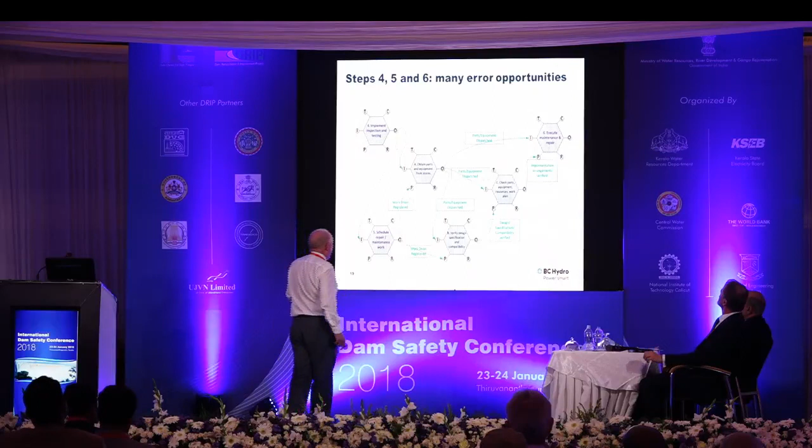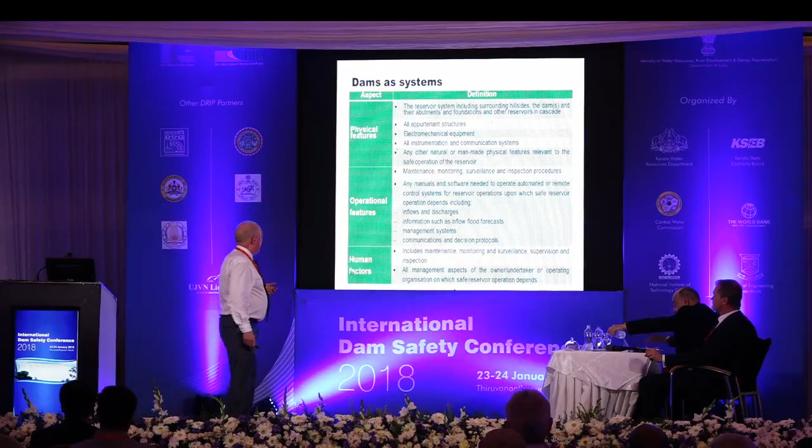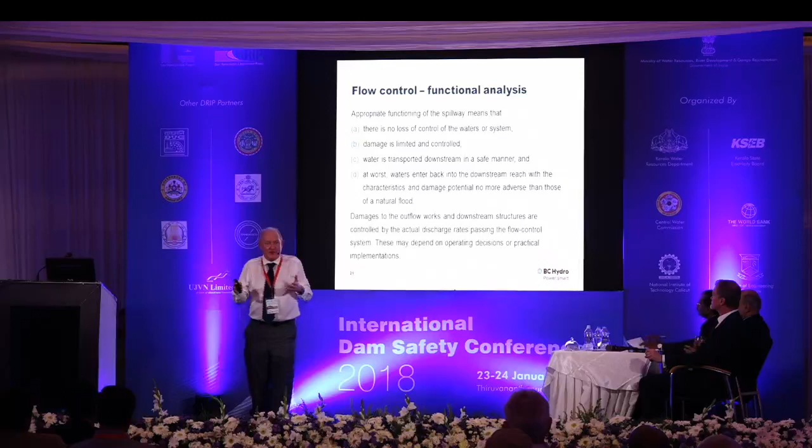If I go back to traditional risk assessment, you're typically looking at the problem, and most of it is focused on large earthquakes. What we want to be able to do is a functional analysis of the flow control. If you do a functional analysis, you know how it works, and you determine how it fails. Really, things fail because of what we call unusual combinations of usual conditions.

We had a case where a rat got into the powerhouse, shorted the exciter of the generator. The generator went offline, powerhouse flows were lost. We switched over to the low-level outlet, which hadn't been maintained properly, and it blew out, so we couldn't use that. Then we had a second low-level outlet, which had never been maintained at all because we were never going to use it, and it blew out as well. So we lost complete control of the reservoir.

So this problem can only be addressed by looking at the physical and functional arrangements between all the parts.

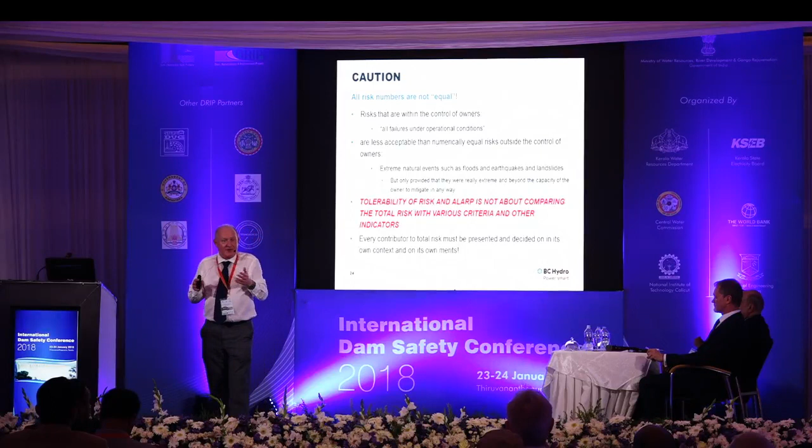Now, here's another thing if you're working with quantitative risk numbers that you need to be very careful of: not all risk numbers are equal. Risks that are within the control of the owner are much less acceptable than risks that are outside control of the owner.

And if you go back to that messy diagram that I showed with all of the connections, etc., that's where all of the incompetence, the negligence, the cutting of corners, all of these things happen. It's at that level that maintenance budgets are cut, or engineers would much rather be doing big projects, so they don't bother with these little things. The little things matter.

And it's all covered in the book on operational safety of dams and reservoirs. The independent forensic team found that the reasons we justified this book for, all but one of them happened at Oroville. So if we really want to make sure that we are managing the vast majority of our risk from dams, it's the operational safety that matters. Thank you.

Thank you, Des, for a very interesting talk. It was actually quite a good follow-on from your presentation yesterday, where you introduced some of these concepts, but you've fleshed out a little bit more the theme of operational mode and the failure mode, which is an interesting concept to take. So thank you, appreciate that.

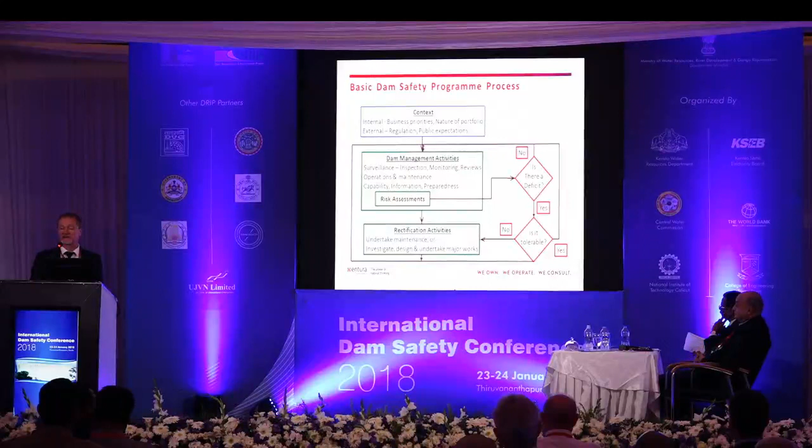We've included a more overt process around performing risk assessments, which I'll talk about further. Flowing out of that is a range of activities to rectify any deficiencies found. You need a feedback loop for that process, whereby every time you identify a deficiency, you ask: is it tolerable? If it is, you can proceed, potentially just monitor and continue to watch the risk. If it doesn't pass your tolerability criteria, then there's some rectification to be done. That's just a very basic conceptual framework for managing the program.

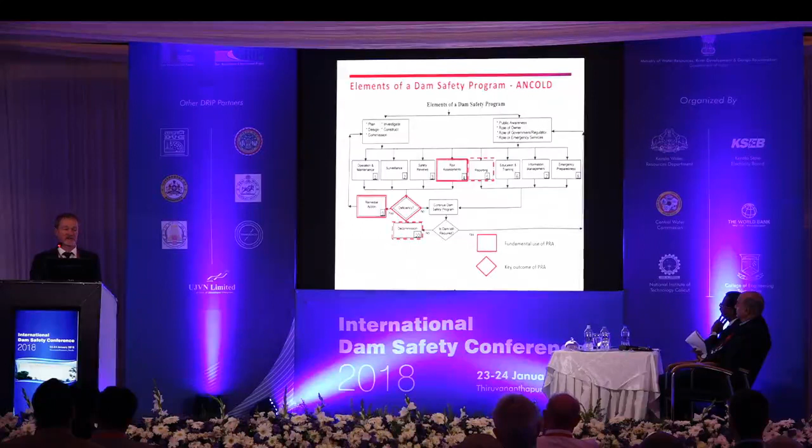In my paper I presented the elements that ANCOLD lists as being pertinent to a dam safety program. I'm not going to talk through all of those, just to highlight that a number of them quite overtly talk about risk and the application of risk in implementing the program.

So these are the main ANCOLD guidelines that help drive what we do to manage our program. There's one on the guidelines on dam safety management, and I'll talk a bit more about that in a minute. The second one is the guidelines on risk assessment. And outside of that, there's a range of other guidelines that have been presented.

I was very pleased to see that the conference opened yesterday at the inauguration with the launch of a range of documents produced by the DRIP program by the CWC, which will be available to all participants. I'm very keen to have a look at those and see what the content of some of those guidelines are. But these are the ones we use to drive practice in Australia.

In terms of the guidelines on dam safety management, it covers fairly general areas, including the accountability of a dam owner, the purpose and elements of a dam safety program, the role and carriage of a surveillance and monitoring program, the importance of operations and maintenance, emergency preparedness, reporting and review.

Again, reasonably straightforward elements, but it's very helpful to have some guidance, particularly when those guidelines receive peer and international reviews, so they have some level of credibility, and they're often adopted by a regulator. The regulator in the state-based regulations in Australia may well reference the ANCOLD guidelines.

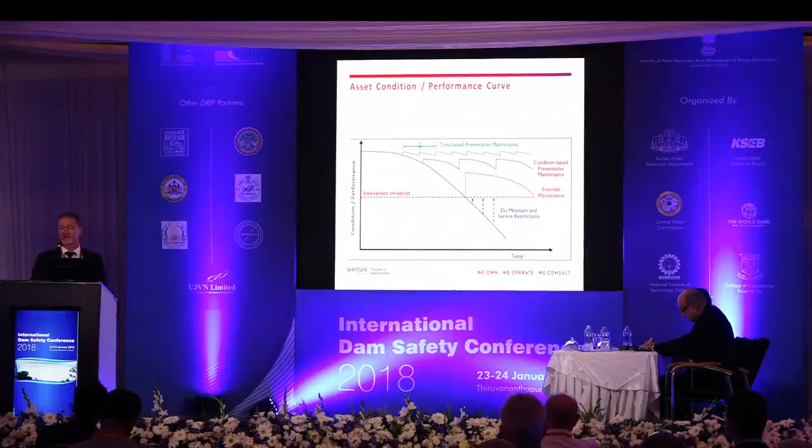So there's a number of ways we intervene to try and maintain the life cycle of an asset. You have time-based preventative maintenance activities, condition-based activities, or reactive activities whereby you identify a deterioration, a fault or a failure and go in to rectify that. Each of those three processes has some validity, but when you've got a whole portfolio of assets to manage, trying to get a rational basis for deciding what level of intervention to undertake on your assets is actually quite a complex process.

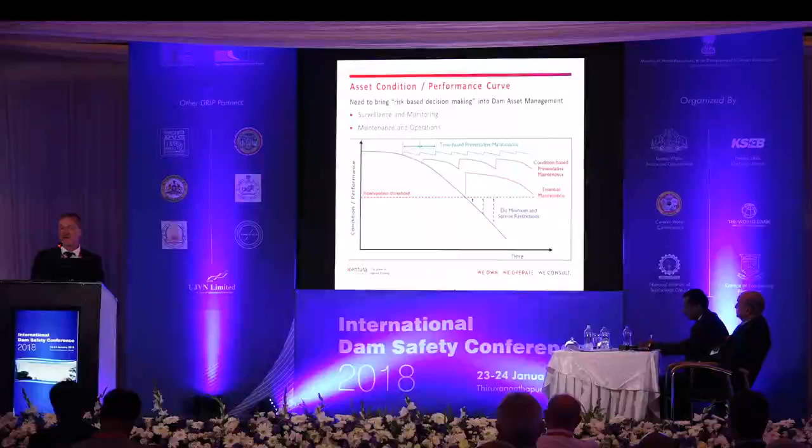For Hydro Tasmania, what we've more overtly chosen to do is bring some kind of risk perspective into the decision-making process in that asset management cycle. So that does include the portfolio risk assessment, but it also includes other things, such as using a risk basis for decisions around your operation and maintenance or your surveillance practices.

Hydro Tasmania has 204 dams in the portfolio, but we're only an island state of 500,000 people. So the customer base and revenue base we use to manage those assets isn't particularly large. It's very important that we find ways to optimise the application of resources to managing the portfolio. We have a significant number of high and extreme hazard category dams, the more important, higher profile dams.

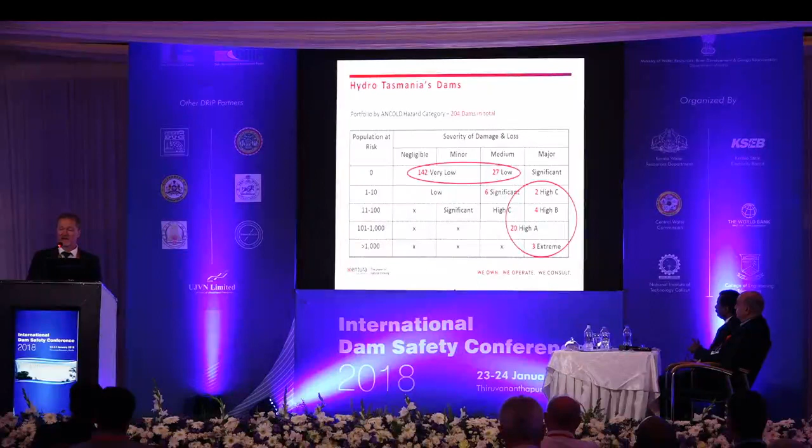But we also have a very large number of quite minor structures in the portfolio. One issue is that for those structures, if you don't give them much attention, the likelihood of failure is actually relatively high compared to the rest of the portfolio. So from a brand, reputation, and stakeholder confidence perspective, managing assets in the low hazard categories is still quite important, although on a risk basis you'd tend to put your efforts into the higher hazard category and potentially higher risk assets.

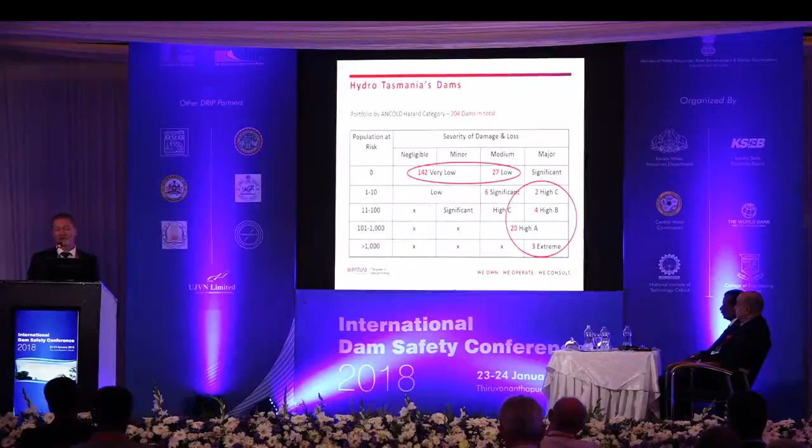When talking about fundamental activities in a surveillance program, visual inspections are probably at the very front line. Here's the table from the ANCOLD guidelines that gives guidance on inspection type and frequency. It shows everything from routine visual inspections on a daily basis, three times a week, or monthly for certain types of dams, through to intermediate inspections, generally annual but sometimes two yearly or five yearly, and comprehensive inspections on a five yearly basis. That's just the guidance in the guideline.

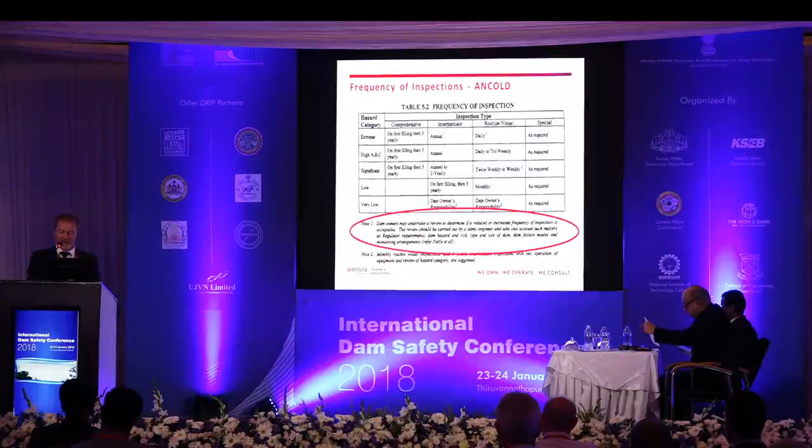This is the actual image. I reproduced it because the text wasn't very good. This is the image from the guideline that describes that, and you'll notice below it there's a note pertaining to those inspection frequencies. The note says dam owners may undertake a review to determine if a reduced or increased frequency is acceptable. The review should be carried out by a dams engineer, taking into account matters such as regulator requirements, dam hazard and risk, type and size of the dam, failure modes, and monitoring arrangements.

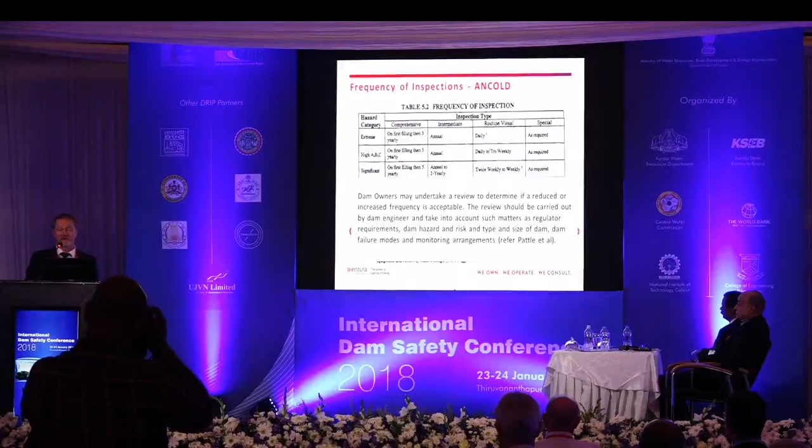The reference there is to a paper produced by Andrew Pattle in the late 1990s. Andrew Pattle used to be the dam safety officer for Hydro Tasmania, and we put this paper forward at an ANCOLD conference some years ago, and it was in fact adopted and reflected in the guideline. What that was saying is that there's a rational basis - if you have a rational basis as an owner to vary the inspection frequency other than what was prescribed in the guideline, you're entitled to do that, and you can mount a defensible case that represents good practice.

The same thing applies, I think, for monitoring installations - the frequency and type of monitoring you would undertake. Again, this is the table from the guideline that provides guidance around that.

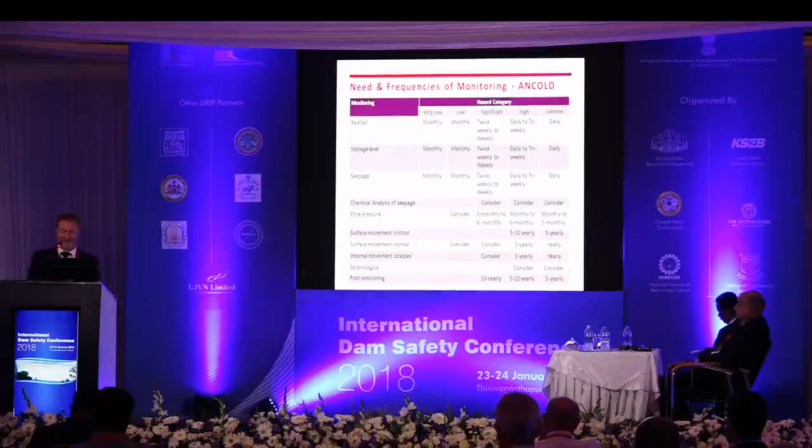The thing I wanted to move on to, this is probably familiar to some of the audience. At one of the ANCOLD conferences, I think around 2006, Mr. John Smart, a former senior officer of the USBR, presented what he called an instrumentation review decision tree. You probably won't be able to read all of it, but it combines two things: a failure modes type of thinking and an event tree process, to give a rational basis for trying to rationalise the instrumentation that you would need at a particular dam.

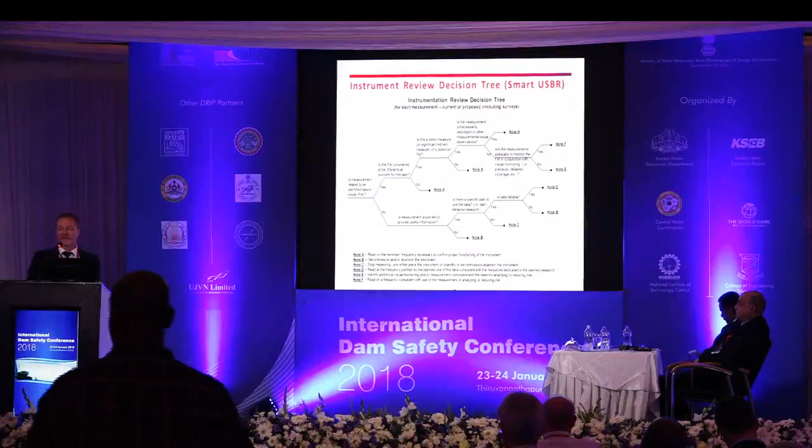Most dam owners would have had the experience where you design and implement an asset. At construction you install a range of monitoring and instrumentation, and then over time some of that might tend to deteriorate to the extent that some instrumentation would fail.

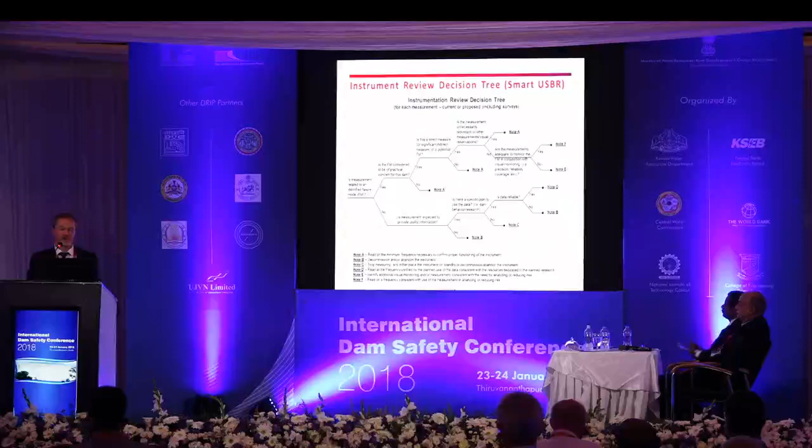The obvious thing to do is go back and immediately reinstall instrumentation, but actually what occurs a lot of the time is that the actual reason for doing that - say that was 20, 30 years after the dam was first commissioned - the reason for that instrumentation may have passed. It was something to monitor the original first filling or the commissioning phase of the storage. And so without going back and doing a fundamental first principles review of the need and purpose of that instrumentation, you can't make a good decision as to whether to replace it.

So all it does is it lists 8 specific questions to work through in a structured process, and depending what answer you get from undertaking those questions, it will lead you to a series of different conclusions about what you should do.

Now, in Hydro Tasmania, what we've tried to do is overlay over that the results of our portfolio risk assessment, because in doing that, we do a lot of work on understanding the dam, its inherent failure modes, its history, the way it's been performing, and then obviously out of that comes a risk assessment. But the information that you gather on the way is actually very useful to apply for other purposes in the dam safety program. So by bringing the output of a portfolio risk assessment together with the framework proposed by John Smart, we've now implemented a way for having a rational annual review of instrumentation at our dams.

So I don't expect you to be able to read this, but it's just trying to show that you can actually bring risk-based thinking into your surveillance program, rather than just using it to try and understand what sort of dam safety upgrades you might need to do.

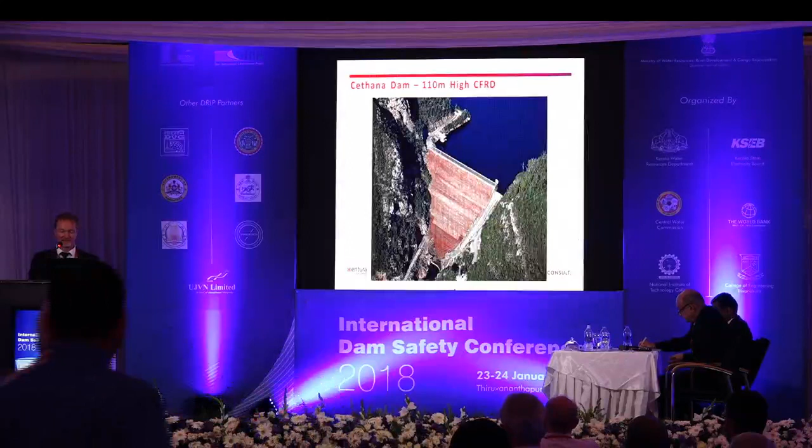So the other part of this then is the actual guidelines on risk assessment, and this is generally where the initiation of a portfolio risk assessment will occur. So it covers the purpose, the conduct and the levels of a portfolio risk assessment. It talks about the importance of gathering data and presenting the level of uncertainty in the assessment all along the way.

Then assessing the failure modes - and this guideline is under review at the moment, and I'm sure that some of what Des has spoken about, operational modes versus failure modes, will need to be considered by the review committee on the guideline. Then you have to consider the limits of tolerability, and then the extent and the rate of treatment of any intolerable risks.

So at a very conceptual level, when we undertake a quantitative risk assessment, we're just looking at a combination of probability and consequence of a range of events. These can be hundreds or thousands of different events depending on the complexity of the assessment that's done. But at a very conceptual level, you get a whole range of individual paired events.

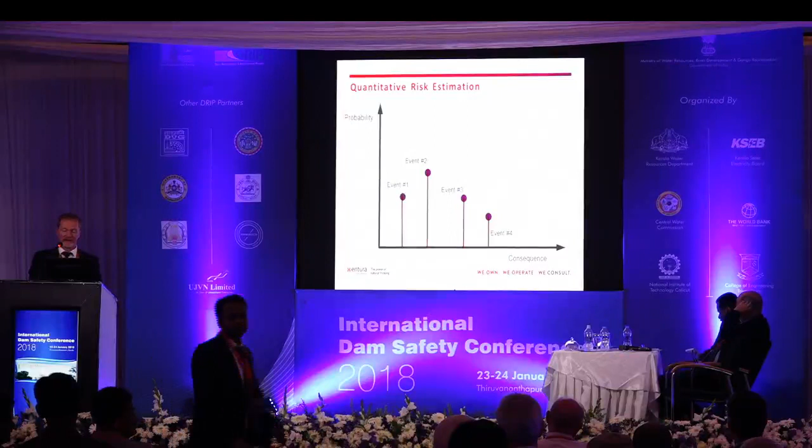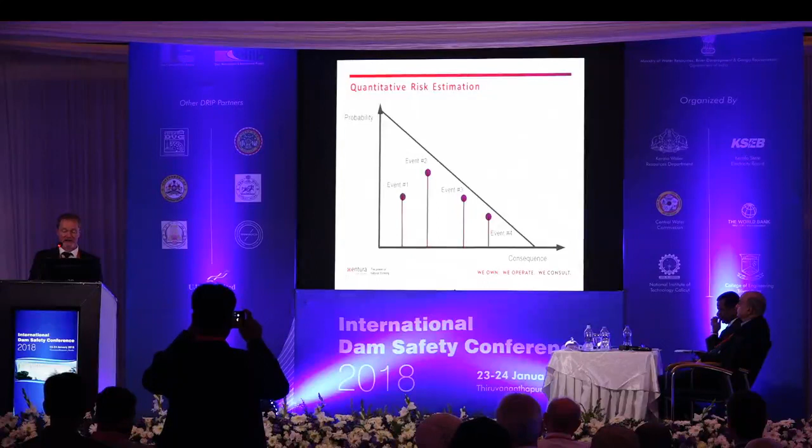And so what we do is we compare them against a line of equal risk, which if plotted on a log-log scale will be a line similar to that one. And then by aggregating those risks, going through a structured process of aggregating those risks together, we then compare that with the line of equal risk.

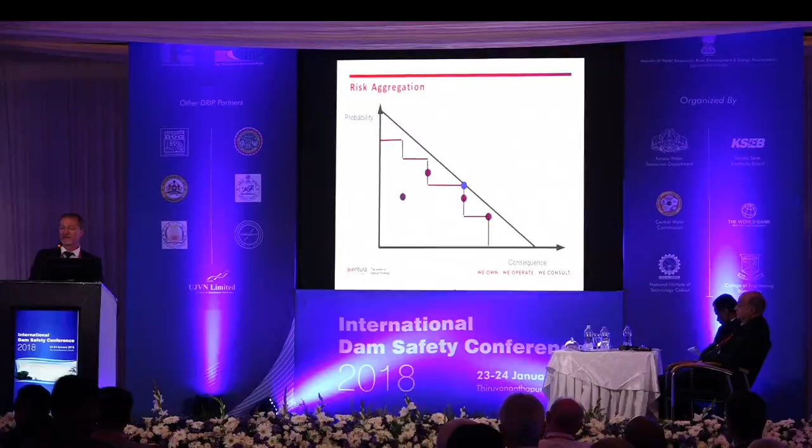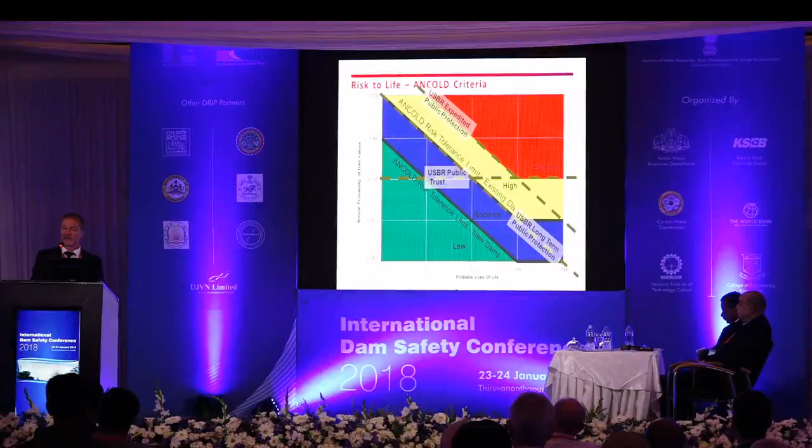This is the same criteria just compared to some of the USBR guidelines, and you can just see the parallel type of assessment that's reflected in the ANCOLD guidelines to what's used largely in America.

And this is the results - so when we did the assessment of our referable dams, so of the 204, 55 of those dams were put through quite a rigorous assessment process. Out of that, we had 12 dams that plotted in a high or extreme risk category. And so those points correlate to the similar point I showed you on that aggregated risk chart a moment ago. So then over a process, over a number of years, we developed a program to actually mitigate those risks, and I won't talk about that in a lot of detail today.

That's the subject of a number of other papers that are available. But over a period of time, those risks have been mitigated via a range of quick win, structural and non-structural works to the dams and the processes of managing those dams, and then a lot more information gathered to reassess the risk. This is how they plotted it after that initial stage of mitigation. Now that's not to say that they're complete.

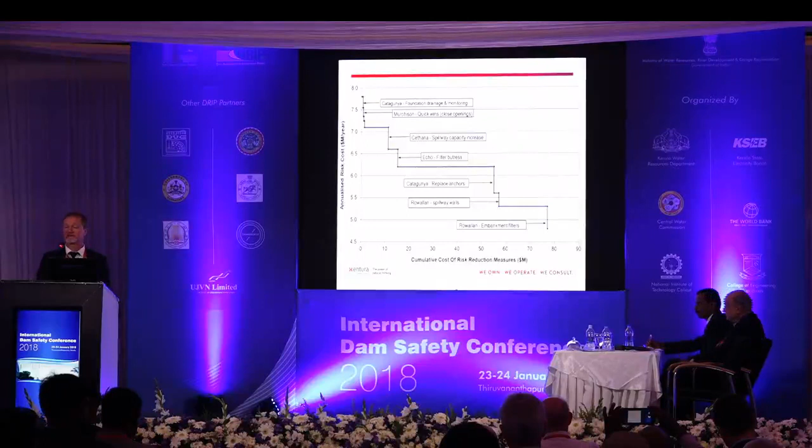So this is my final piece. I'll just show you one example of a dam. This is a 110 metre high concrete faced rockfill dam in Tasmania. It's quite an interesting structure, and when we did the risk assessment, there were a number of issues that arose. It had all of those items I've listed as potential risks.

The first of those that we chose to do further investigation on was the stability of the spillway walls. You can see even from that photo and the model that was developed, they are quite a slender wall, and there was evidence of deformation of certain panels, with differential deformation at the crest of 40 to 50 millimetres, showing that the walls were moving.

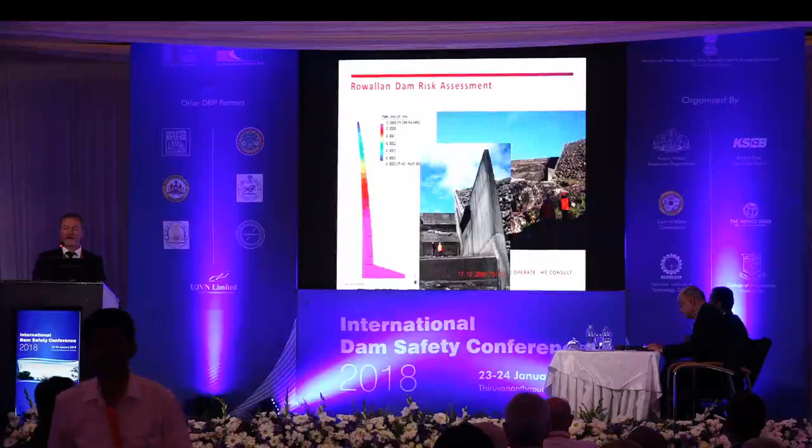An analysis of those walls showed that with the lack of reinforcement, or the very light reinforcing in them, there was a high likelihood that they were cracked on the rear side. Some investigation was done to try and determine that, and some evidence of cracking was found. So, of course, when the risk assessment was done, that came up as a very high part of the risk assessment.

So an initial quick win was done, whereby we restrained those walls from moving further into the spillway by constructing a dead man wall in the embankment and then pinning the wall back to that wall. That was the initial quick win fix. Then followed some investigation to try and understand the nature of the core in the dam.

So a range of investigation procedures were undertaken, and that led to the next highest risk, which was the risk of piping adjacent to the spillway walls in the embankment. That led us to then excavate down behind both spillway walls, remove the core material, and replace it with compliant filter material to reduce the risk of piping.

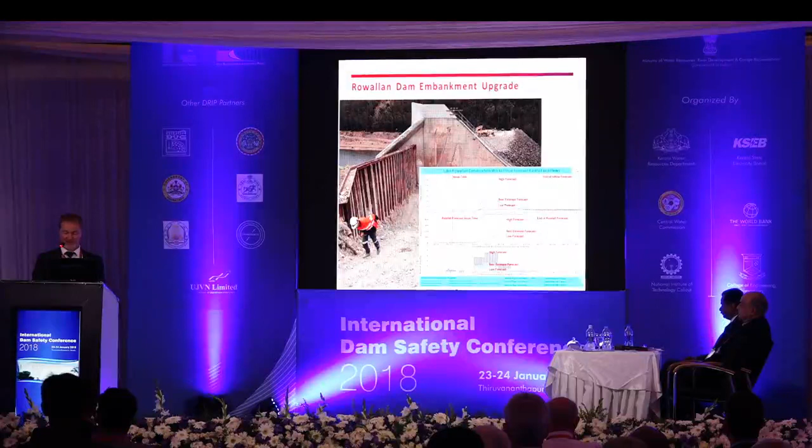So that dam has had, out of all the risk issues listed, we've addressed probably the top 4 or 5 of those, and there's still a number of things to be done, but they've now been scheduled in the program for a later date, because from a portfolio risk perspective, the value of continuing to reduce that risk has now been overtaken by other items in the portfolio.

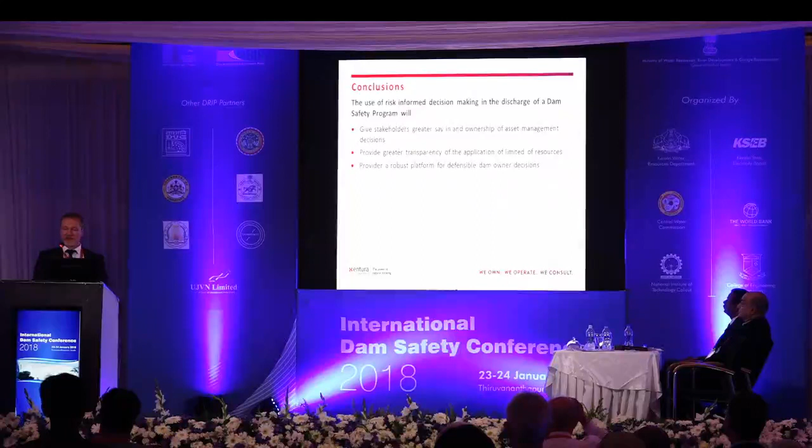So there, I'll leave it at that. Just a couple of conclusions: the use of risk-informed decision-making has been a very useful and helpful thing in the discharge of the Dam Safety Program for Hydro Tasmania. And the portfolio risk assessment itself has given us a great basis of information on which to make a lot of those decisions. Thank you.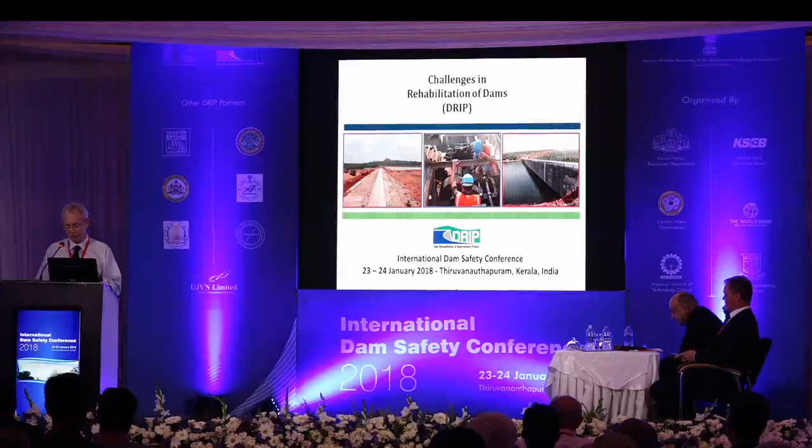What are the challenges for us when we're out there in the field? We've got some design we have to implement. We've got problems, we've got things going on. So what I'm talking about here is how do we execute our projects in a time-based manner?

After looking at almost 700 contract packages for construction and other applications, we found a lot of interesting items. And most of all, we can say that...

These delays — and I always tell the contractors this, and I tell our engineers during the training processes for construction — get that contractor working, because the worst thing that can happen are these delays. Many of my reports say contractor not on site.

Why isn't he on site? Here we are, we're building a dam, and he's not working this week. He's on holiday. The contractors are losing money, and they don't understand. So why are we overshooting these schedules, and why are we not doing these things?

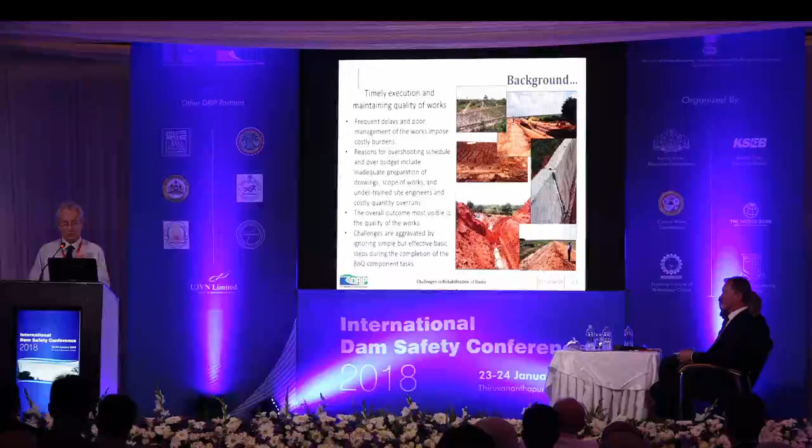Because a lot of the times, we don't have all the necessary documents that we need to do the work. It's a learning process. Not everything's perfect.

I imagine even with Angus talking about when they're looking at reconstruction of these dams, how do you prioritize the work? How do you get it done under budget or on budget and on time?

What we find out is that if we hurry or we don't take care of these small things, the quality of the work really, I'll say, sucks. It's not good.

But we have other examples where they've gone back and corrected it. Our job at CPMU is to oversee this work, and we make recommendations and findings of non-compliance. Our job is to help them, guide them, to make sure this job gets done on budget, and all the recommended work is in place.

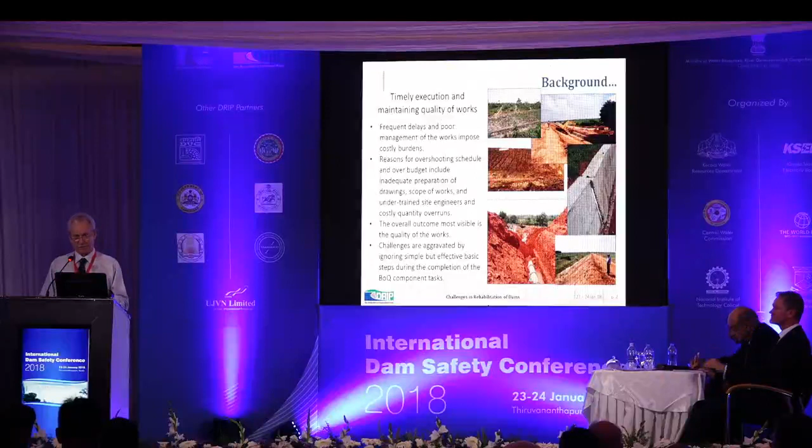So these challenges — I'll say there are some basic steps that have not been taken care of. With over 650 contract packages, we have an opportunity to actually address these and use these steps in our implementation of the works.

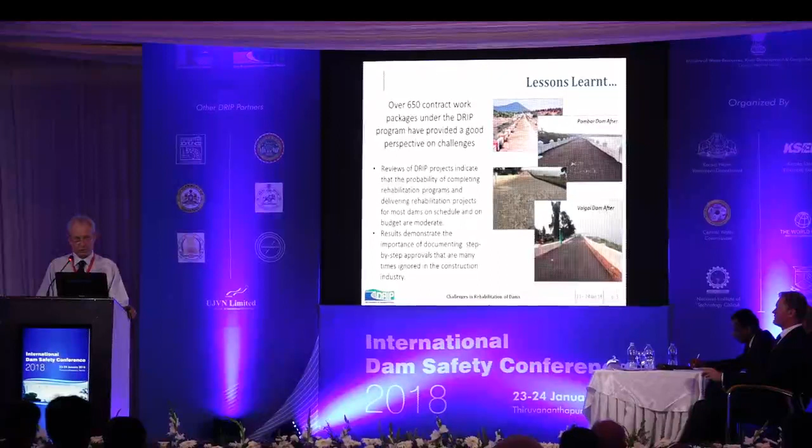On my last point here, the results demonstrate the importance of documenting step-by-step approvals. We find some good examples, and a lot of bad examples, of how you go through the process where every component of each BOQ item has been reviewed, looked at, and approved before going ahead.

Has it been surveyed? Do we know the elevation? Has the shuttering been put in place in good manner? Is it tight? It's not going to sag when you start putting concrete in it. All these little things — who approved the form?

Who approved the concrete mix? Is the rebar at the right spacing? All these things are on OK cards that we're using, and many of the implementing agencies are now using these to monitor the performance of their work.

The water quality is bad. There are some industries upstream, so we cannot drain the reservoir in order to really do what I call a good fix of the dam. So we're using interim risk reduction measures in light of that.

One of the things that's gone on here is it's been curtain grouted five times. It's a masonry dam, but it leaks around all the water stops, and nobody's addressed that issue. We're working on that. They've done some interim solutions, but we want them to move forward and take care of the water stop problem.

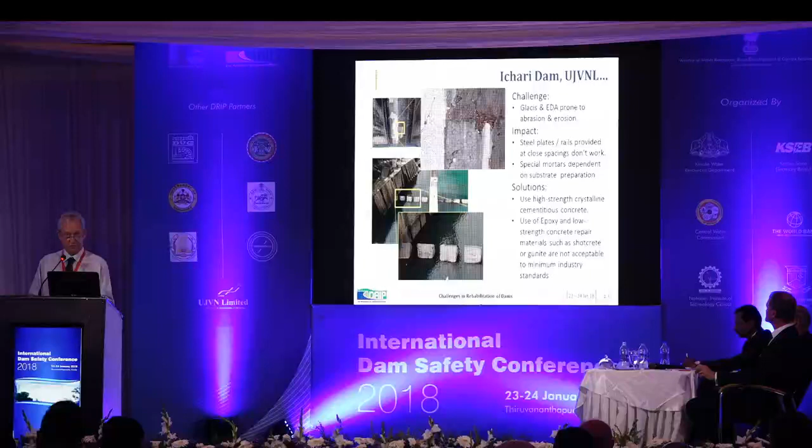And what we have found is that it doesn't always work, even in this case. This stuff is very erosive coming over the top of the dam. So how do we fix those problems? We're experimenting on another dam up in Uttarakhand using 2 different types of concrete. So we're still learning, and it's a learning process for everybody. And I think we'll be successful on this one. We've totally looked at it. It's being implemented in a good way.

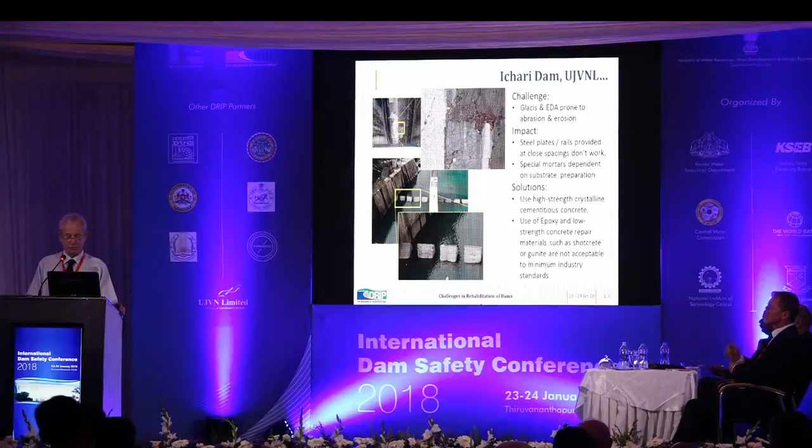Other problems we've seen are rough spillways. They want to make it better so they get a better flow going over the spillway. They've used epoxy. Our impact on this, it doesn't really seem to work, or the substrate wasn't prepared correctly. So these things have to be looked at in very good detail, with lots of consulting, to make sure that this is the best solution for the dam.

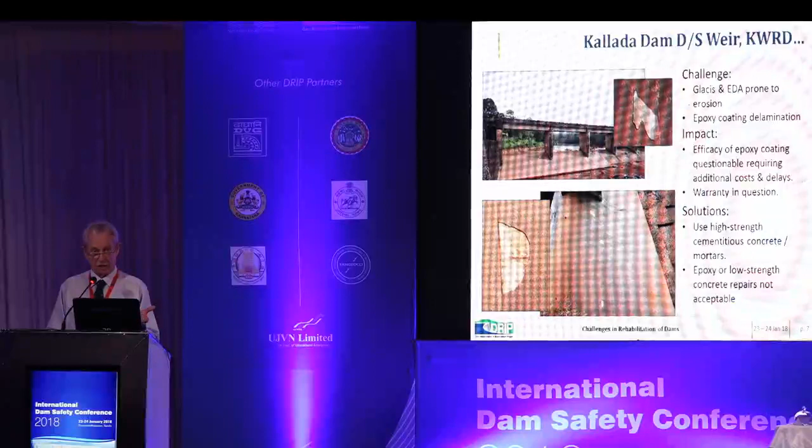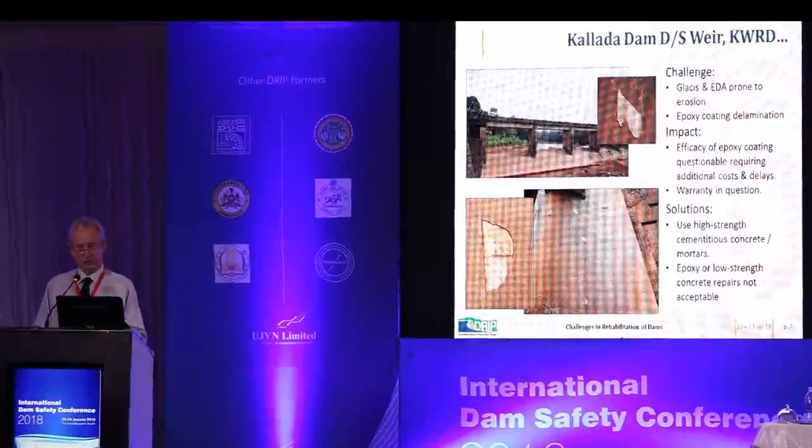In this case, the epoxy is already delaminated. So now it's got to be taken off, and that's going to be a hard job in itself. So these things don't necessarily work. So our advice is no epoxies in the general sense on the surface of a glacis. It just has problems.

Another dam, Mordhana Dam. I'll say that I'm a remote sensing guy, geotechnical, but I am a very adamant believer in geophysical investigation, non-destructive testing. If you can't do non-destructive, then you can bore the hole and do a geotechnical investigation of it, retrieve samples out, take a look at the problem.

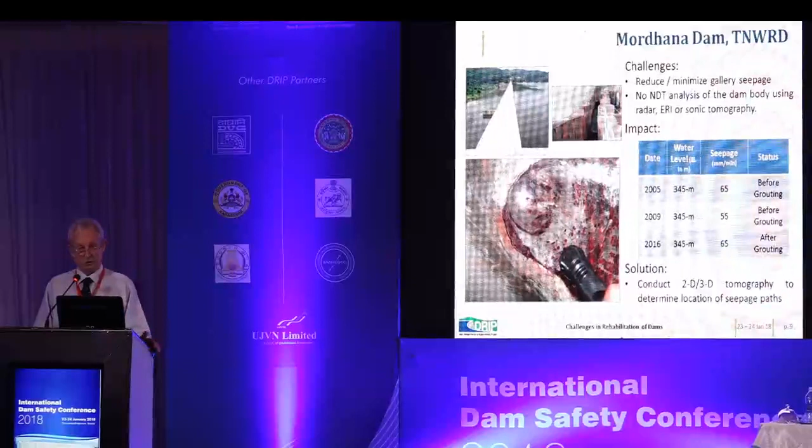Here, they decided to do curtain grouting. And the level at, for our example, right now we've stopped a lot of the water, but the water stops were still leaking. Case in point, 2016: after curtain grouting the dam, the seepage level was still the same as it was 10 years ago. So I'm very adamant that when DRIP 2 or any other DRIP comes on and any dams come up, do the needful, get that geophysical scan done if you have to, get some pre-engineering ideas, and then you can go through those and implement them in a good manner.

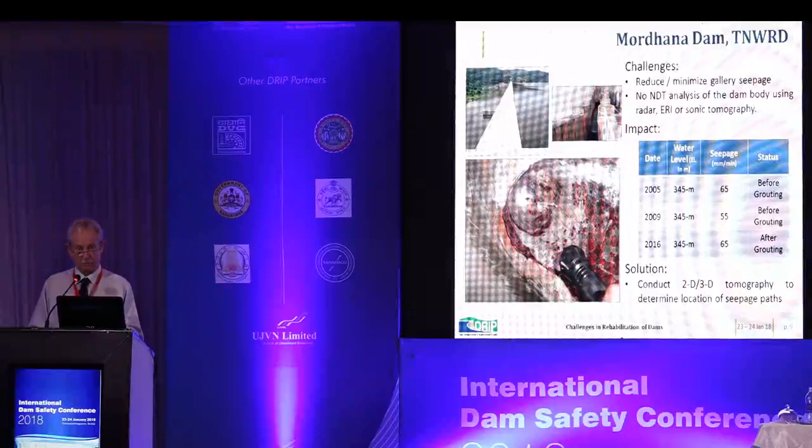So this says that we have to find better ways to manage the vegetation on these dams. You know, it looks nice—well, not nice. How do you inspect an embankment dam if it's full of brush and timber? The roots die, the root decays, and it becomes a home for termites. It becomes a water access through seepage to the dam. So there are ways to do this. Environmentally friendly herbicides is one way. I've been using them for 25 years, and it works well. And also, operation and maintenance.

I think he's talked about it in your portfolio. How do you manage? How do you get the people out there and budget for these people to come out

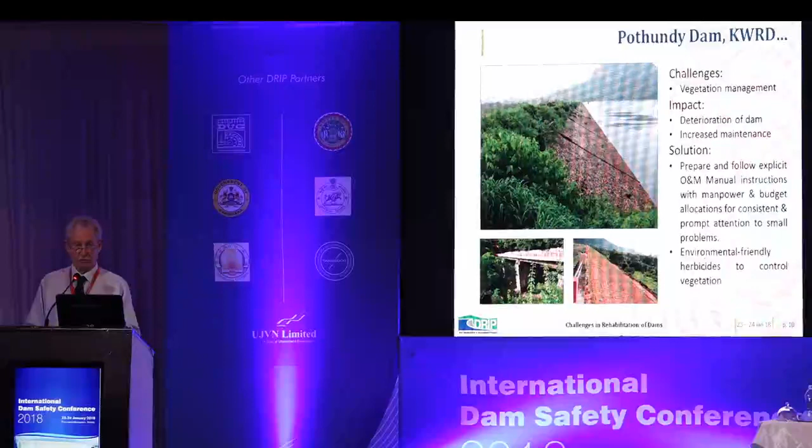Oh, it's the rains, the grass is grown, and the trees are grown because it's a monsoon period. You know, take care of it. There's not enough staff, I know that, and that's a big problem on budgeting for people to come out and do the work. But there are other ways, like using herbicides to control your vegetation.

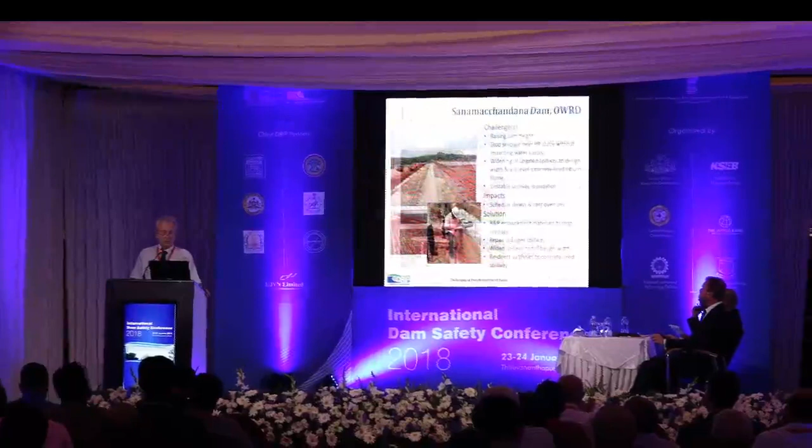Another interesting one, the ungated spillway, 125 meters, almost was damaged in 1992. They had a flood event, and the block quartzites downstream just kept peeling off and rolling down the hill all the way up to the apron. They backfilled it with gabions and concrete, gabion baskets, rock-filled baskets, and lots of concrete. But they closed off part of the spillway.

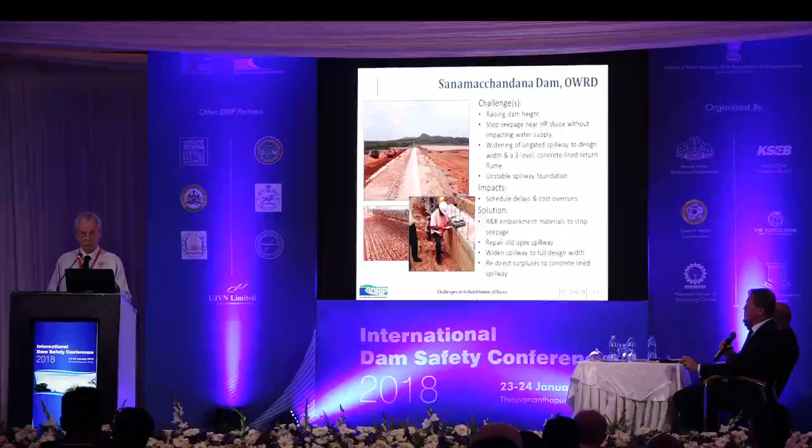So with the revised flood, we had to raise the dam. We wanted the full 125 meters. They're putting in now about a 400-meter long, three-level flume spillway there. So there are solutions. It also had seepage around the right bank canal. They had to go in there and fix that also using grouting methods.

Ed, you have 2 more minutes. Good, just about finished. Sholayar, another dam, 66-meter high dam, that also needs to have geophysical investigation. I think that's being planned. We've done as far down as MDDL, as far as grouting and repointing the upstream face using cementitious mortars.

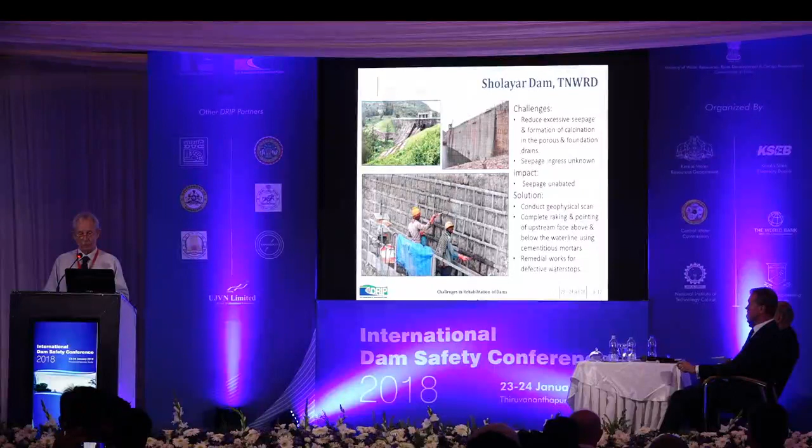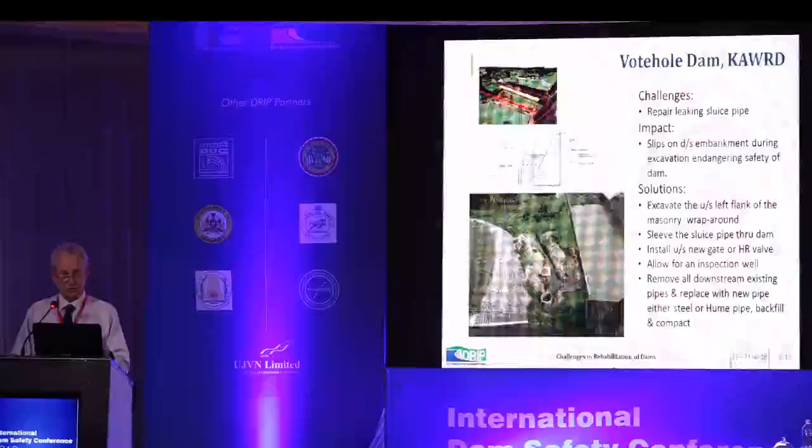One other one is, when we talk about work on the downstream side of a dam, any dam, the modus operandi is don't dig holes. In this case, they had a leaky shutoff valve on the downstream side from an old sluice pipe that came through the dam. How do you fix this? It has to be fixed from the upstream side. We've made that recommendation to the agency, and I think they're working on that now.

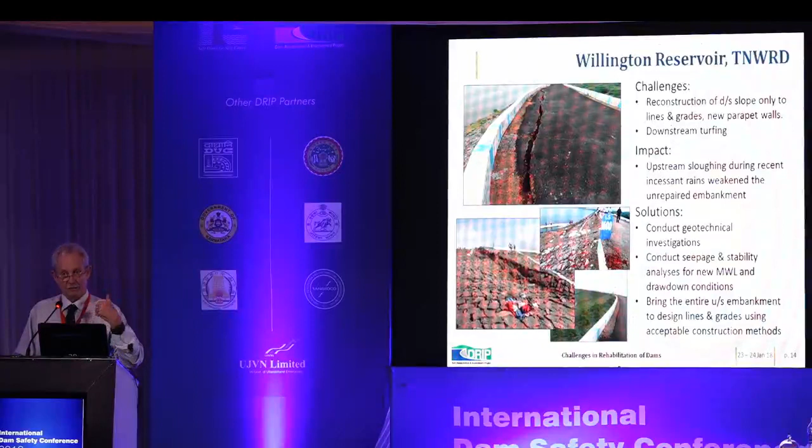Willington Reservoir, upstream slope failure. The downstream on the drip was all done, flattened the slopes. This is a 100-year-old dam. On the upstream, they had fixed 900 meters or 1,600 meters before, but they didn't finish the upstream side to flatten that slope. It sits on very soft foundation material, and she slipped, high water. And now our recommendation is to finish the upstream side all the way to the end.

No partial work here. So what I want to say is that the things we're experiencing here in India during the rehabilitation project, now almost 3,600 crore, are not unique just to India. The problems we see when we do investigations in the foundation are not unique to India.

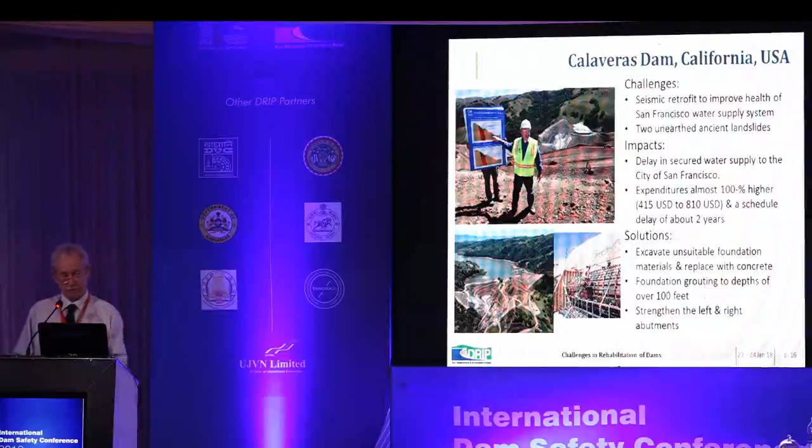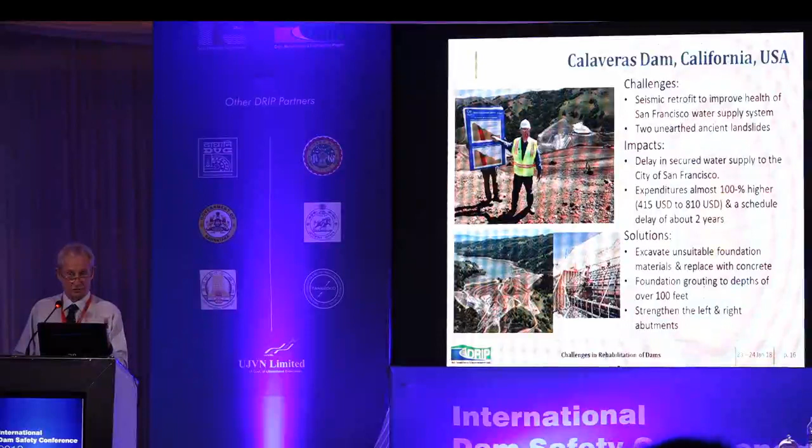Since then, when they started excavating, whoops, we had a slide, an ancient landslide that was unearthed, fell, 1,000 cubic meters of concrete. Relook at it again, more studies. They excavated the right abutment, more failure, another landslide, ancient landslide. Whoops, now we're 2.5 years late. The price is now $810 million. One dam.

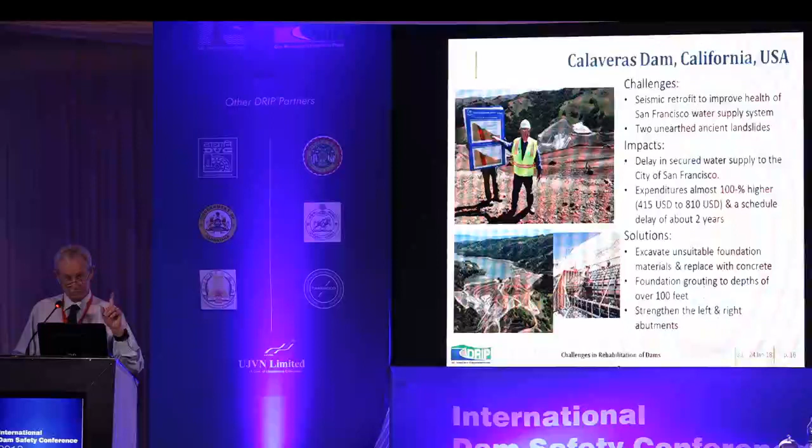And these things, new technology, yes. Construction management training, yes, we've been doing it here. I want more construction management because many of these young engineers don't have the skill set it takes to do this. And also prefabrication of work.

At Narayanpur, they're prefabricating the bulkhead gates and moving them up to the top of the dam. Very uniform, very tight tolerances on these gates, so they're all working well. And also, the contracts are complicated here. I'd like to see them simplified.

So just to finalize here, skill, knowledge, and ability, this SKA, I call them. How do you do a job? How do you execute that project in a good manner? And also the willingness of the implementing agency and the dam owners to take charge. I want to see more of this. I see good examples and I see bad examples. I want more. And ownership. How do we get ownership?

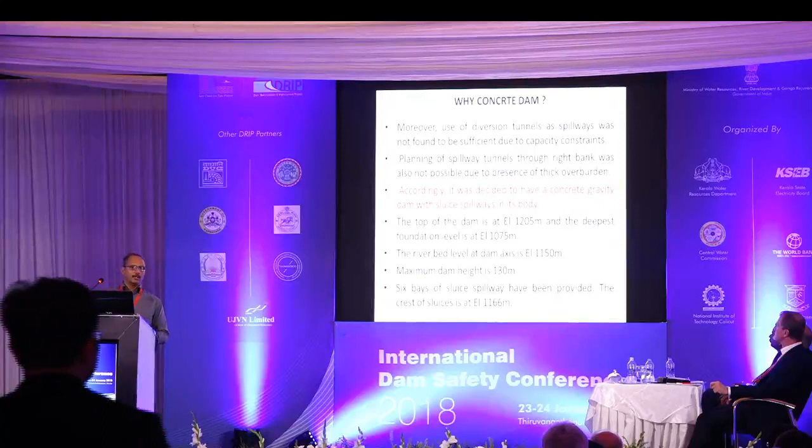Accordingly, it was decided to have a concrete gravity dam with sluice spillway in its body to pass the 15,000 magnitude flood. These are some typical details: this is the elevation. Top of dam is 1205 elevation. Height of the dam is 130 meters. And it has 6 bays, sluice spillways. It has 6 bays.

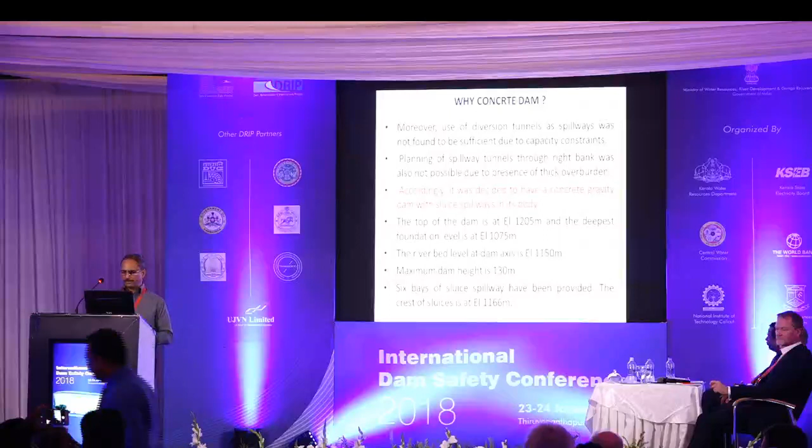So when excavation in the dam pit reached the level of 1190, the right side abutment faced a slide of 3 to 5 meters. So the challenge was to put the dam on this slided material, on this slide zone. For this, about 14,000 meters of drilling was done for investigation. About 37 boreholes were drilled to know the geology, and deeper geological investigation revealed the presence of deep-seated, two major shear zones along which the slide took place.

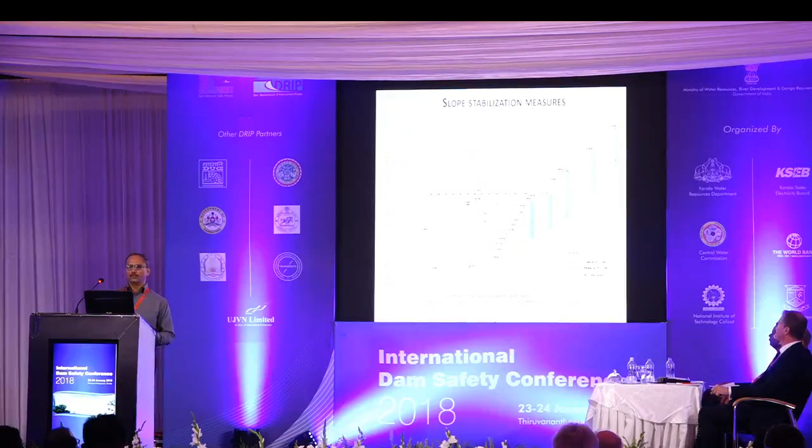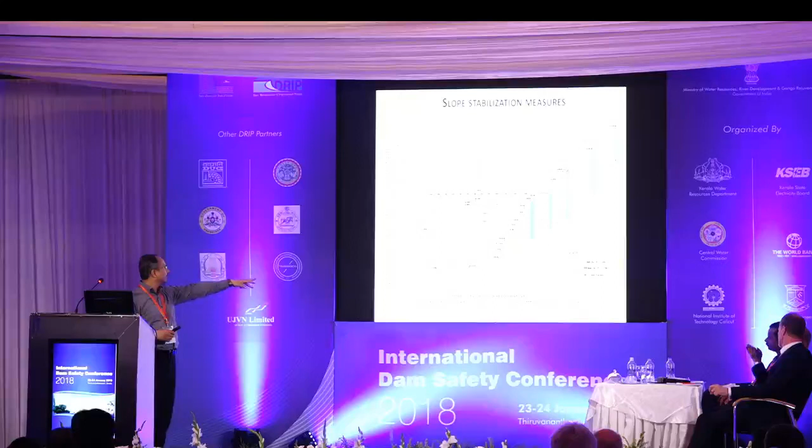So the slope stabilization measure has been done, from the top you can see these two shear zones which have been encountered. This one we call SZ1, and this is SZ2, vertical. So along this, the slide took place.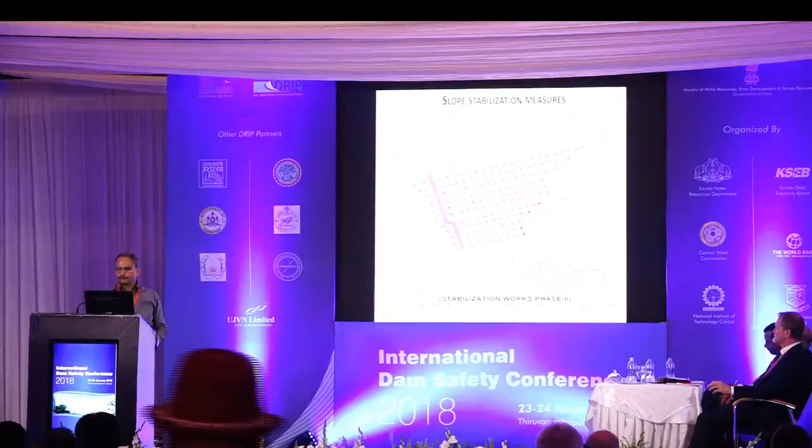So you can see this red continuous line is the secant piling along this. So this is again the holistic stabilization measure: grouting, cable anchoring, micropiling, and 2 meter dia piling.

So in conclusion, a dam can be built successfully even at a site with difficult foundation. Deep foundation and heterogeneous, adverse rock mass at foundation level, as well as in the abutment, pose challenges in the main dam foundation stabilization measures for slope stability and seepage control. For that, we have provided secant piling. Thorough geological investigation is necessary to minimize surprises.

So the foundation requires some treatment to satisfy the basic requirements I told you: stability, deformation, and water tightness. Various measures are available to increase the foundation shearing strength by grouting or cable anchoring, stability of the abutment, foundation stiffness, and to reduce foundation seepage.

Deep foundation and adverse geology at the right abutment of Punatsangchhu-I project posed several challenges, just like these three: slope stabilization, foundation improvement, and seepage control. We have controlled all these three parameters, which have been tackled using the latest technology. Thank you.

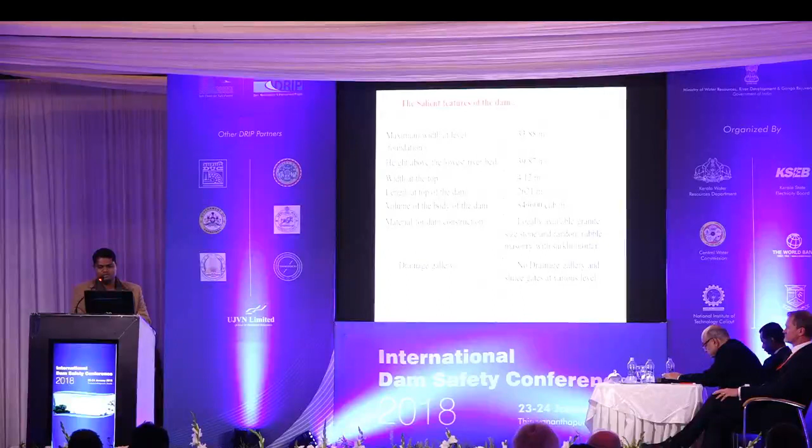There is no drainage gallery in this dam. Catchment area is nearly 10,880 square kilometers, and width of the river at the dam site is 277.44 meters. The capacity of the reservoir is 48 TMC, and the historical maximum flood received was 6,035 cumecs in 1961. Original cost of the dam was 9.1 crores, and there are a total of 173 vertical gates in this dam.

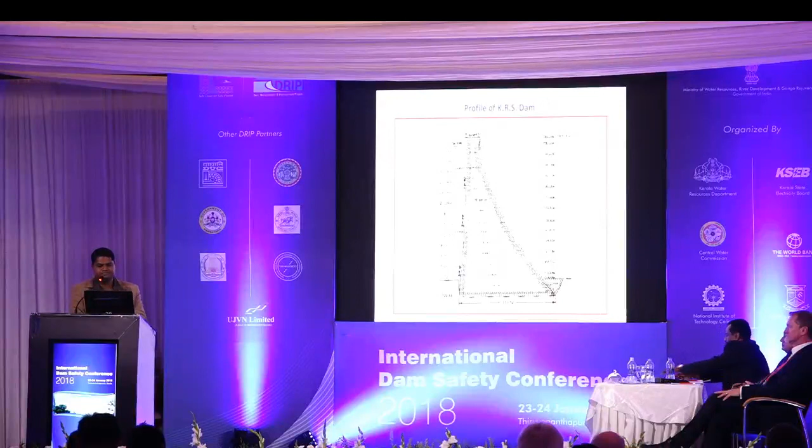This is the profile of the KRS dam. Various organizations, CWPRS and DSRP, had inspected it regularly and suggested some rehabilitation works.

Based on their observations: sweating on the downstream face masonry portions between chainage 1460 to 1850, leaching of pointing mortar at some places, springs of water on the downstream at 2120 have been found. Damages in seals of gates leading to leakage through these seals, peeling of mortar in masonry joints of the apron with pitting of surfaces, distress on the upstream face like deep and wide openings between masonry joints. On the downstream side, gate piers through masonry leakages are observed.

A study suggested for diagnosing the causes of distress: rotary drilling of 150 mm diameter boreholes with videography should be done. These are some of the initial visual observations, such as sweating on the downstream face and wide openings in masonry joints.

CWPRS recommended suitable cementitious mortar for raking and pointing, and grouting of the dam body to improve the density of the dam body.

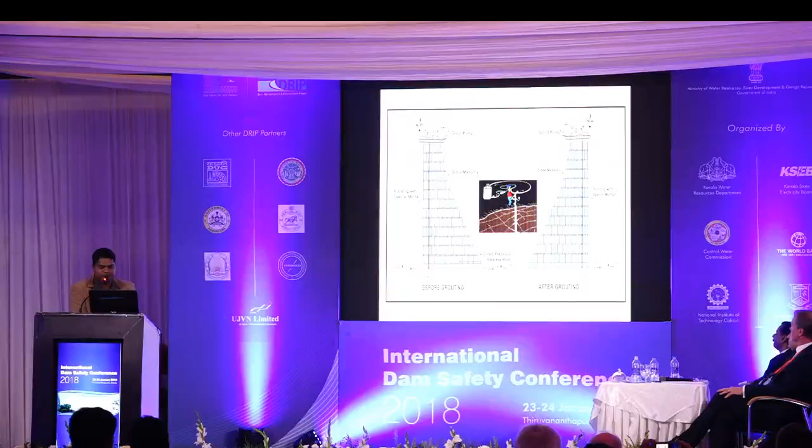This is a small animation showing how the grouting is done, and after grouting, this is the body with grouted staking. Drilling and grouting machines in operation.

Conclusion: the age-old 100-year dam Krishnaraja Sagar has been successfully rehabilitated by conventional methods of upstream pointing and body grouting, after proper investigation studies. The observations and suggested remedial measures by experts during execution were very useful in achieving good results of rehabilitation. The works executed by the agency were qualitative and effective.

The quality and properties of repair mortar PACC supplied for pointing of masonry were consistent for each batch of material, and were in good agreement with the test report of CWPRS.

The DRIP inspection team, especially thanks to SPMU and CPMU consultants, the dam safety review panel members and appointed experts, periodically visited the dam to exercise quality checks, and their reports are satisfactory.

The procedures followed in rehabilitation of the 100-year-old KRS dam were methodological and executed professionally, duly following safety norms as per suggestions of CWPRS, KERS, DSRP and the DRIP team. Recommendations of these institutes were very much useful in achieving the required results. These institutes contribute to correct assessment of damage and remedial measures of dams.

Lastly, the sweating and springs of water observed on the downstream side of the dam, after rehabilitation through upstream face pointing and body grouting, has been completely stopped.

DRIP intervention approach for KRS dam: being a heritage structure, retaining originality in architectural, aesthetic and monumental ambience was our uppermost concern, and all our efforts were to enhance the safety and integrity of the heritage structure, utilizing inputs from art and archaeology. KRS dam will serve and inspire future generations to adopt aesthetic values for engineering works.

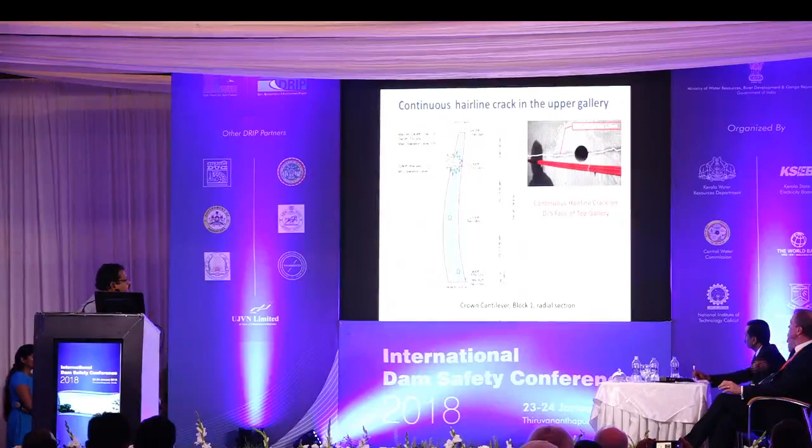Upstream is always under water, while downstream and upstream are both exposed to temperature effects. Since it's an arch dam, the monoliths are always grouted, making it a monolithic structure, so temperature fluctuations constantly affect the arch dam. This is the gallery crack at the upper gallery level. We tested with a 45 centimeter core, splitting the core around. This was the crown cantilever section.

For crack treatment, we removed the loose surface plaster and cleaned the crack surface with compressed air and water jet, cutting a groove of size 25 mm wide and 25 mm deep along the crack, and filled them.

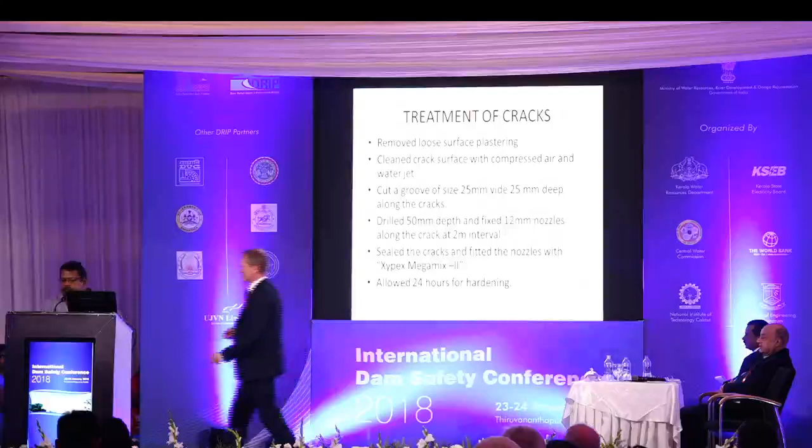Yes. You need to face here. Yes.

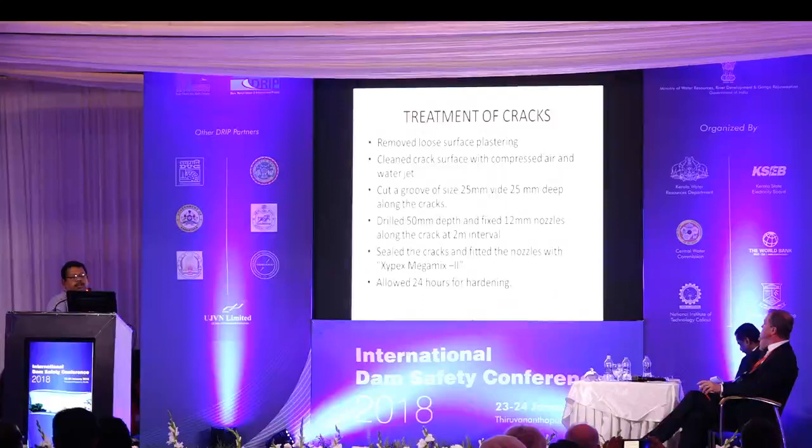We cut a groove of size 25 mm wide and 25 mm deep along the cracks, drilled a 50 mm deep hole, and fixed 12 mm nozzles along the crack at 2 meter intervals. We sealed the cracks and fitted the nozzles with Xypex Megamix 2, and allowed 24 hours of hardening. This is the crack treatment process we followed.

For grout preparation, we used Alcofine 1108 SR cement manufacturer, with an admixture of Xypex C 2010 at 20% by weight, and a water-cement ratio of 1.1, achieving a Marsh cone viscosity of 26. In field testing, we measured the Marsh cone viscosity, mixed it with a colloidal mixer for 5 to 10 minutes before injecting, and continued stirring while grouting.

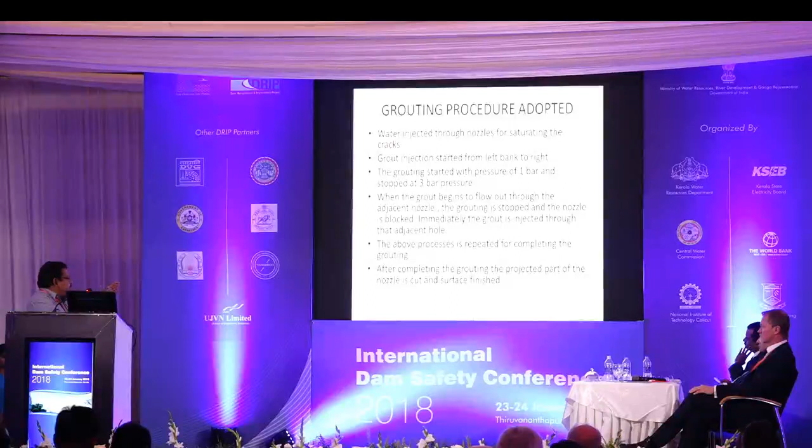Grouting started with a pressure of 1 bar and stopped after 3 bars. When the grout begins to flow through the adjacent hole, the first hole is blocked, and injection continues through the adjacent hole. This process continued for sealing all the cracks, and the above process is repeated for completing the grouting. After completing the grouting, the projected part of the nozzle is cut and the surface finished.

This is why we adopted microfine cement. The grain size distribution is shown here. Alcofine 1108 has got a D95 of 15 microns.

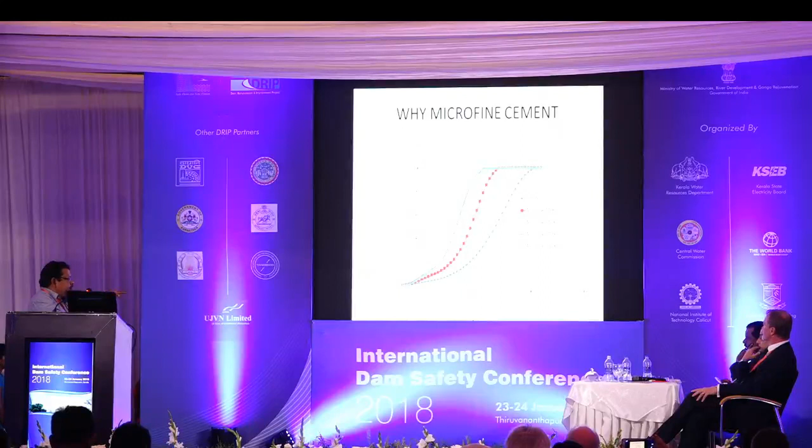SR is a superplasticizer already added to Alcofine 1108, so that flow is obtained. Also, the bleeding is very low for the Alcofine. After 60 minutes, the bleeding of the grout is very slow. So we used that, and we tested these properties in the lab.

Alcofine alone was tested, and Alcofine with 25% Xypex admix was also tested. We got good results, and the Marsh cone viscosity was only 28. Marsh cone viscosity of water is 24. So we got an apparent viscosity of 28 Marsh cone viscosity.

So the grout freely gets through the cracks and seals them, with slightly bleeding, but we completed one mix within 1 hour. So for final setting, this is the result tested with the admixture.

After these studies, we also conducted a geophysical investigation by Parsons Group, and they reported that the crack depth was 3 to 4 meters.

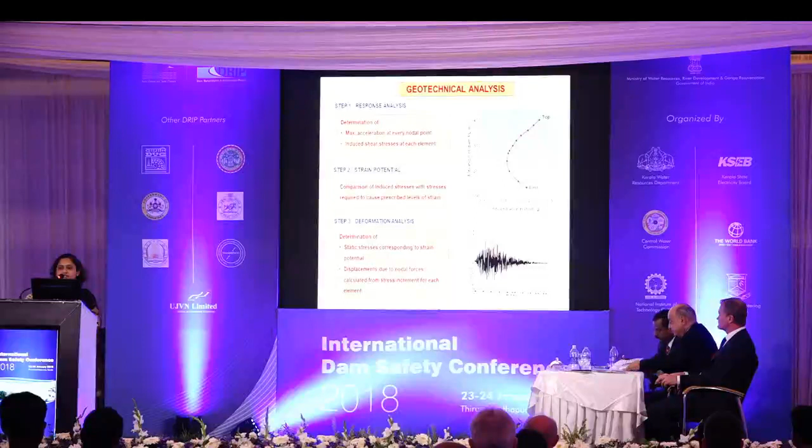This method certainly has an advantage over the pseudo-static method. The pseudo-static method gives you the safety or stability of the dam in terms of only one value, the factor of safety. But here you actually get to know how the dam body would deform in the event of an earthquake.

The results of this study showed the crest settlement was to the order of 0.02 meters against the freeboard provided of 6.1 meters. So it was found that not much damage would occur, and there would not be any overtopping of the dam. Maximum horizontal crest displacement was around 0.31 meters, and these are the values of maximum vertical and horizontal displacement that would occur at a particular node in the dam body.

So it was concluded that Ukai Earthen Dam can withstand a design earthquake having maximum ground acceleration, although local and insignificant yielding in smaller zones near the top of the dam can occur.

To conclude, based on the studies, there are many rehabilitation measures available, but selecting and designing the optimum remedial measures is a skilled task, and there is no generic solution applicable for undertaking dam rehabilitation measures. Owing to the site-specific characteristics of the projects, a detailed site investigation has to be done for every site, and a detailed analysis based on numerical methods has to be done.

Numerical methods provide a great tool for design of optimum rehabilitation measures, because we actually get to know what is happening inside the dam body. And instrumentation, apart from providing information about the health of the dam, the data can also be made use of for designing rehabilitation techniques. Thank you.